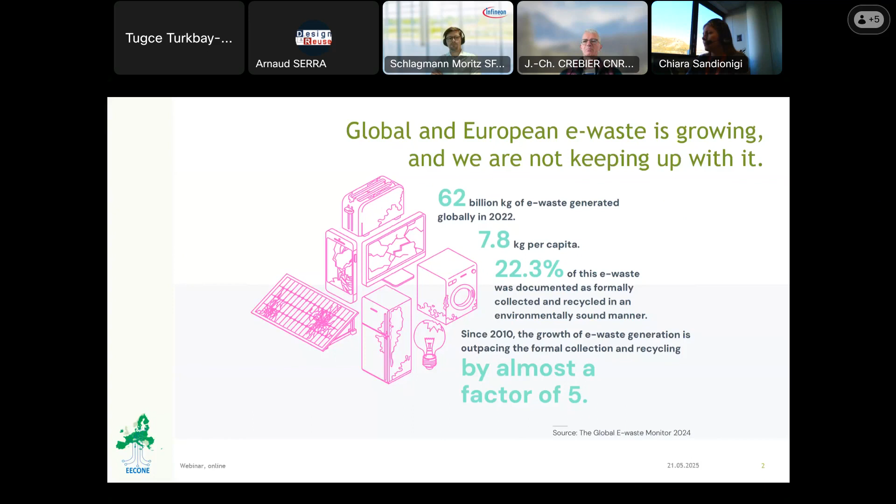So the EECONE project, we are guided by the 6R principles: reduce, reliability, repair, reuse, refurbish, and recycling. And our 4 key objectives, therefore, are: first, we want to define green ECS. So we want to have clear, simple and open tools to define the ECS for circularity.

Then on the second step, we want to make green ECS, and this is what we learn about. What can we do about it? And also showcase the green solutions, and then building consciousness around us. Today we have 4 interesting talks.

So in general, we are over 50 partners from all over Europe. And today we will hear interesting talks from Fraunhofer IZM in Germany, from imec in Belgium, from Dassault Systèmes from France, and Nero Bianco from Italy.

And in EECONE, we have this toolbox, and it's being developed even better and better as we speak. And what I'm trying to show here is kind of the wide variety of tools in the toolbox that are in use and in development within the EECONE project. You can see that various levels of sustainable electronics are being addressed, from the IC chip level at the bottom up to assembly and even system level evaluations, with a wide variety of goals and a wide variety of scopes.

I'm not going to go over all these tools in detail, but I highly recommend looking into the ones that are of interest for your specific application, your specific study. But the main thing I want to show here is that by combining different expertises from different organizations that all bring their strengths to the table, you can address a wide variety of complex problems.

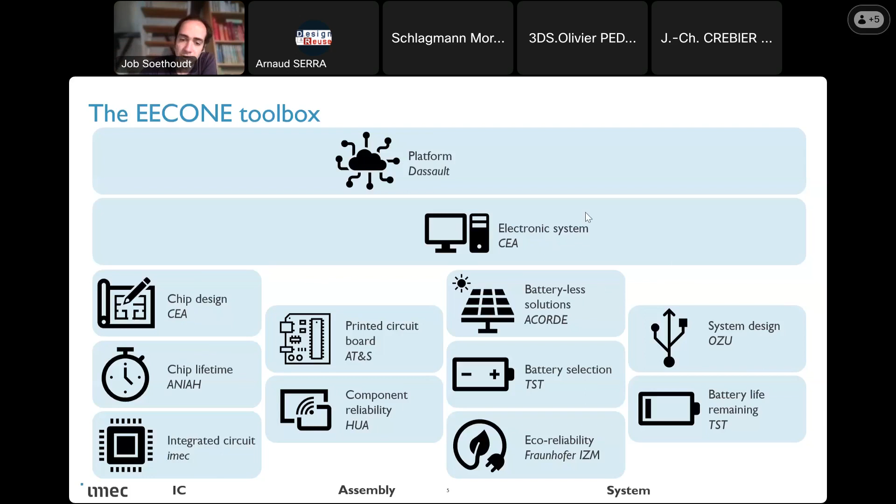So what does this approach rely on? Only two things. Firstly, the tools need to be good. And secondly, the collaboration needs to be good. Good tools. I take here my own tool, not because I think it's the best one. In fact, every tool has a very different purpose. This is just the one that I can answer questions for because I know it.

So for instance, this is one tool that we develop to assess the environmental impact of IC chip manufacturing. And it goes into quite a bit of detail where you can select options. For instance, I want to assess a CPU, or I want to assess a memory technology from a certain generation, die size, from a certain fab with specific properties. And you can then put all these parameters into the model, and it will basically build a bottom-up fab model around it to then ultimately generate things like the climate change impact or the amount of resources being depleted.

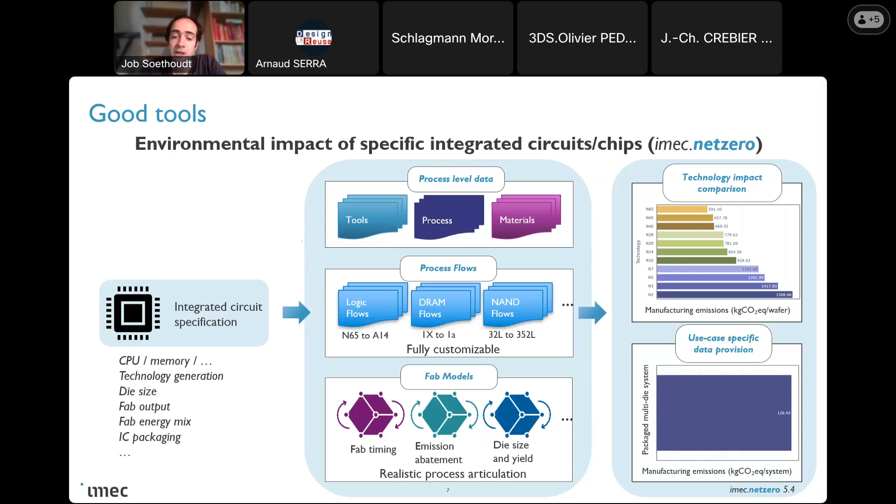And this is basically just one of the tools. This applies to the evaluation of ICs for the specific purpose of environmental impact assessment. But as I showed on the slide past, at a variety of levels in the system, you can use complementary tools from complementary organizations. Then, of course, the second part that is necessary is good collaboration.

The way that we do this in EECONE, we have a use case, which is basically a certain application that wants to become sustainable. And then we have the tool makers that provide tools like the ones I've just shown on the last few slides. It is up to the use case lead to go to the various tool makers and say, this is the information I need from you. For instance, we need to understand how much we can reduce the carbon footprint and material use by making a thinner printed circuit board, which is something, for instance, that the AT&S tool can help with.

Then the tool maker, in this case AT&S, can support a use case lead to meet the need by basically specifying, okay, these are the parameters I need for your specific application, and then we can support your exercise of becoming more sustainable in your electronic products. And then, of course, there needs to be mutual clarity on these are the assumptions I'm making, and this is the methodology I'm using to answer your specific need.

And this is really, in a very brief overview, why our approach is, I believe, so strong, because we combine good tools that rely on the expertise of a broad variety of very experienced organizations within the European ecosystem, with good collaboration to address these use cases with a wide variety of scopes and goals. And of course, this approach is not limited to the ones that we're currently studying in EECONE, but the approach is generalizable to an even wider variety of applications, with the ultimate aim of course, working towards sustainable electronics across the supply chain. And that's basically what I wanted to share briefly on the scope of EECONE and how it can also help your specific applications by following this approach.

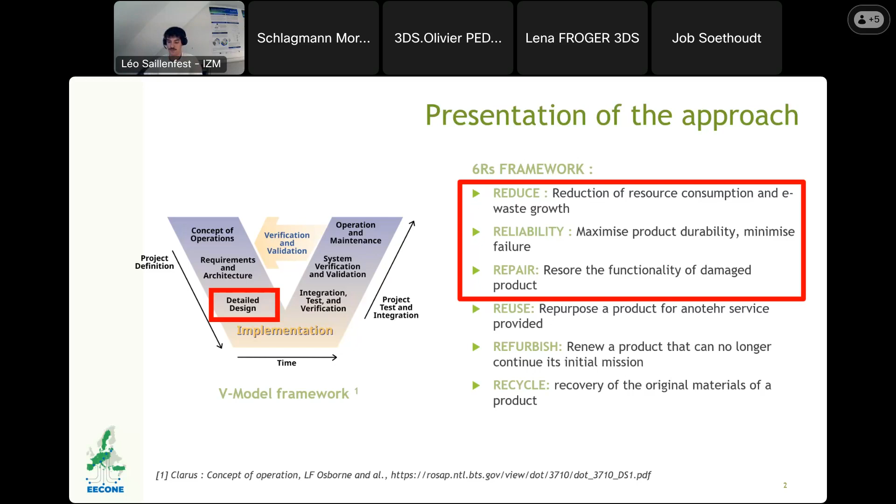Let's go now further into the overview of this methodology. This methodology is divided into 5 steps. The first one is about the expected lifetime. Then you do a reliability study, repairability study before going to the environmental impact assessment. And you finish with a new metric, which is called effective environmental impact, and that brings these 3 topics together.

Let's dive a bit into, first of all, this approach: you will have to determine the expected lifetime of the studied system that you want to design. The goal is to really answer how long do you expect your studied system can live. So not the warranty time, not also a super long time because you want to have a product that lives forever, but more how long your product should live before it's not used anymore.

If we take the example of a Fairphone 2 motherboard, most of the phones today are used for almost 7 years. And after 7 years, more than 90% of the phones are not used anymore. So you have to take into account that this obsolescence is here because technology is evolving super fast. You can also take into account potential life extensions of the studied system.

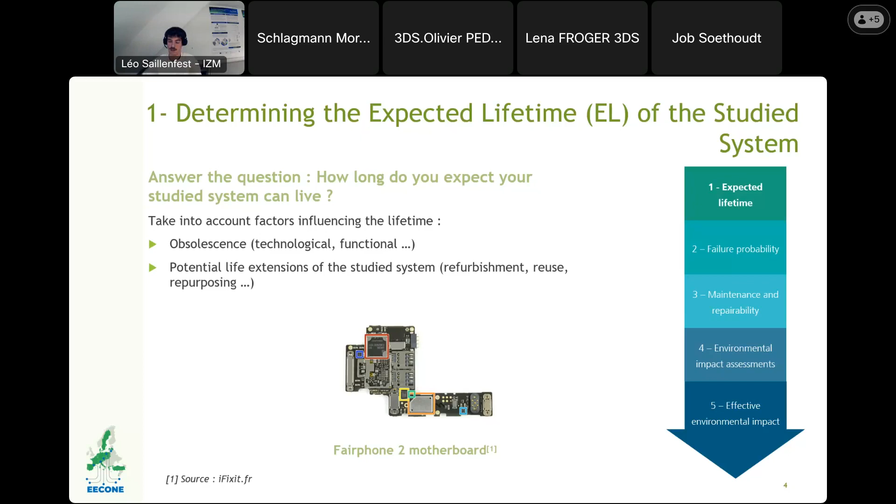Once you've done this, then you can focus first on the reliability study. The goal is to define both constant and aging failure. You have different ways to do it, through estimations, through models like the Weibull model, or different information that you could have about the technology failure rate. You could also work with your supply chain to get these failure rates, or also work with predecessor products that are used in similar cases, or even do some tests or search in the literature.

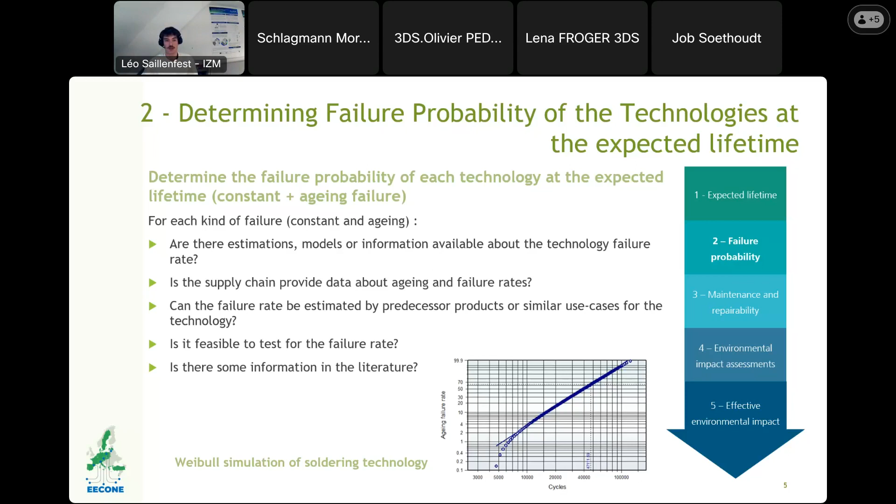Once you get this constant and aging failure rate, you can focus on the maintenance and repairability of the product. In this part, you have to focus on, for each technology, in the case of failure, what needs to be replaced, how can we repair the product, what's the whole process to do this. So in case of failure, what's the smallest part we can replace? It could be just a joint in case of a joint failure. It could be the component also in case the component is also failing through the joint failure. Could be a submodule, or even in case of no possibilities to repair, it could be the entire product that we need to replace.

And once you've done this, you have to focus on the repair, the process to repair, and also on whether you, the company, or a third professional party, or the customer itself is able to do it. Because if no one is able to repair the product, even if the process to repair exists, then you should take into account that your product cannot be repaired, and then in case of failure, you need to replace the entire product.

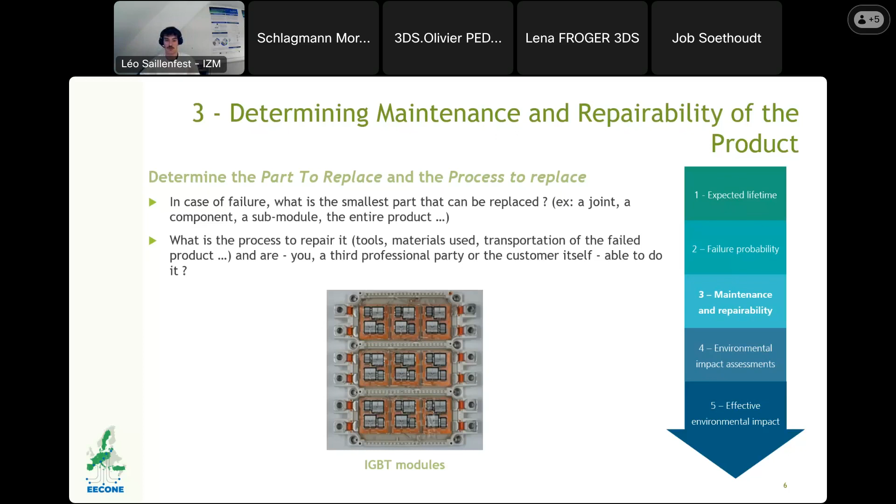Once you've done the repairability assessment, you can focus on the environmental assessment of the technologies themselves. So for each technology, you should do the environmental assessment, and to ease your work you can focus only on the differences between the technologies. If you have some steps that are done in the two technologies, then you can avoid them. And once this is done, you also have to do the environmental impact of the repair process for each technology, which means the production of the part to replace, the material and energy consumption, and also the transportation.

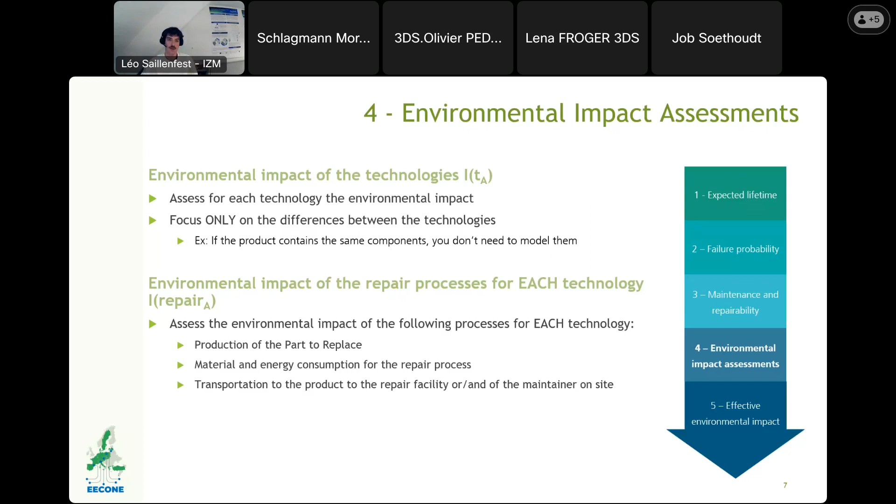And when this is finished, then you can bring everything into one new metric, which is the effective environmental impact. And this combines the environmental impact of the technology itself, like for the production, which is still here, and you have to add a certain environmental impact, which is the failure probability multiplied by the impact of the repair of the technology. And through this, you can find new balances between repair, reliability, and environmental impact of the production.

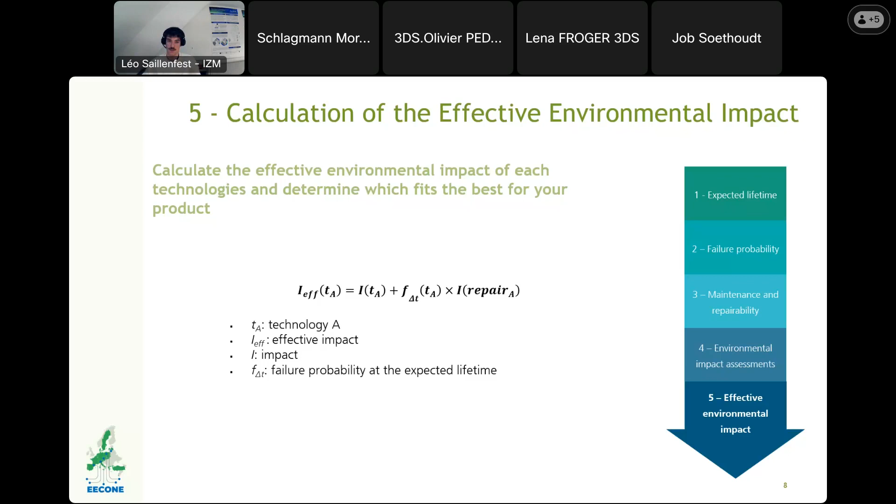To have a short example, I won't dive into the details of the example, but we did a study where we compared sintering and soldering to assemble 3 MOSFETs on a PCB that also had other SMT components soldered on it. And we had to choose between soldering or sintering for these 3 MOSFETs, for a product that we first decided to estimate a lifetime of 10 years.

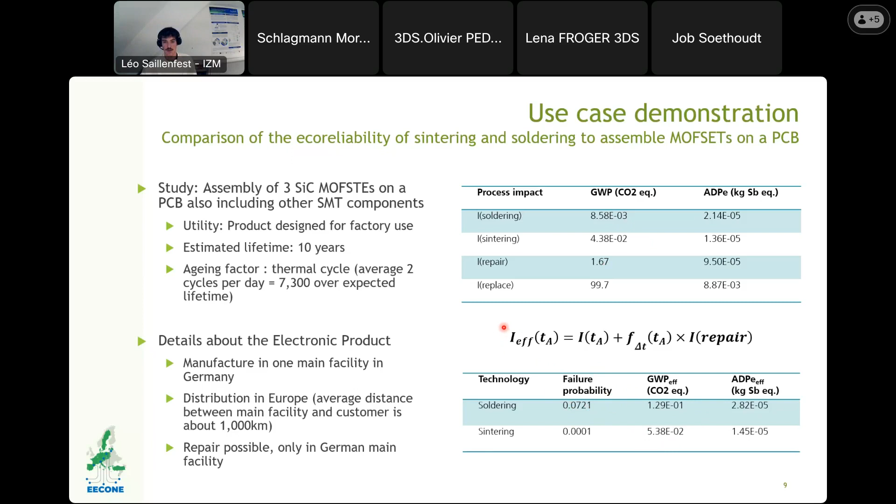And then to finish, this tool can also go the other way around. Where should you put your money to improve the environmental impact of this technology? Where should you focus your time? Is it in the repair, in the reliability of the products, or in the environmental impact of the production? So you can take into account, for example, if there is no maintenance, then you need to replace the entire PCB. It increases a lot the environmental impact of soldering, and in that case, you should focus on sintering anyway. Then if you want to invest some time and money in the constant failure rate, you can see that it doesn't change anything in the results compared to the main results.

And to finish, if you want to invest in the repair distance, so instead of repairing in the main facility in Germany, you use professional repairers everywhere in Europe, not so far from the customers, then you can see that soldering and sintering are the same order of magnitude, and maybe you will choose other parameters like the economic parameter or the brand image to choose if it's better to use soldering or sintering.

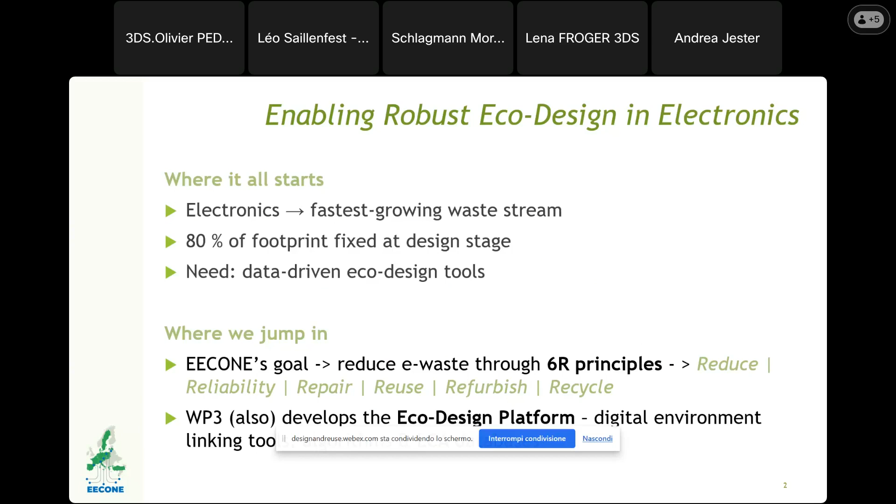So, to cut a long story short, the other presenters have already identified the core focus of the project. And I think the fil rouge leading what they told with the EECONE platform is that we wanted in this project to fine-tune and design something where we can aggregate tools and resources to support eco-design. This is where the Ecodesign platform of EECONE ends up, which is part of work package 3. It might be considered a sort of modular digital ecosystem, designed to support eco-design of electronic components and systems by doing quite many things.

Of course, due to the innovative and research nature of this kind of project, the platform is a sort of evolving creature. But you can already see promising future possibilities and potential for it.

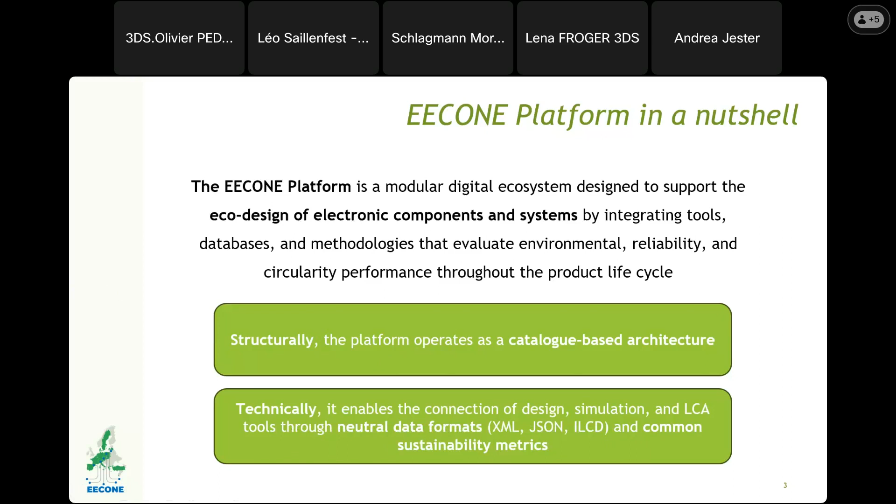And as I always say, as my first employer, I have been working for SAP 25 years ago, said, as long as a person from the business department can easily understand where technical stuff is going to, then we are moving into the right direction. And indeed, the way the EECONE platform is currently being structured is structurally as a sort of catalog-based environment, while technically it enables the connection of design, simulation and actually LCA tools through neutral data formats, which makes it quite attractive. This approach changed a bit during the lifetime of the project.

Initially, the consortium had in mind actually to make it a more sort of 5-layer integrated system. But then we actually understood that it might end up in a sort of too rigid environment, and so it switched to a modular catalog-based platform, where basically each tool that is in there, that I will then shortly present, is identified by an ID card, so easily identifying its scope, the data that are required, and how actually it supports the 6R logic. It makes it, of course, more interoperable, and we guess also more scalable, especially if we think about medium or smaller companies that are looking, as we will see later on in short, how to use things like this.

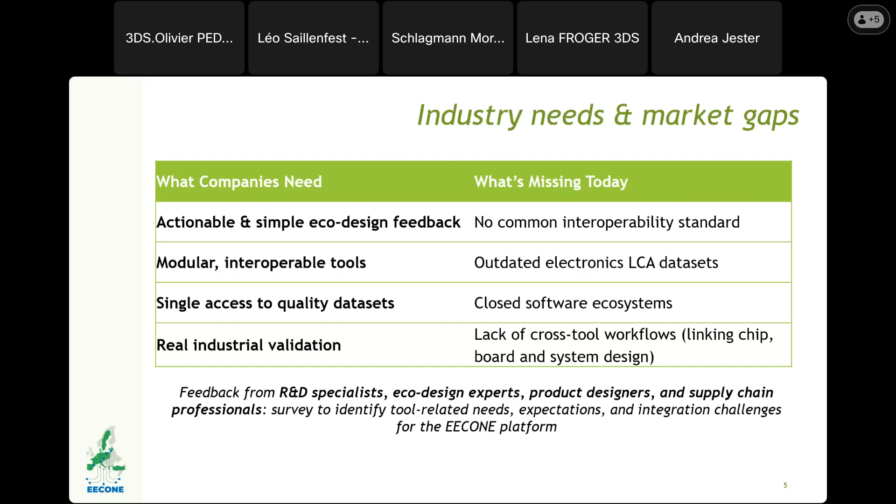The work was initiated actually by a sort of initial survey, where we have been exploring what R&D specialists or other experts would like to find in such a platform. So there are here these 4 major items. So let's move away from these, let's say, long LCA reports; they are looking for actionable and simple eco-design feedback, regardless of the kind of tool that we have. They're looking for interoperability, good quality data sets to start from, and ideally something that is validated also through real industrial use cases. And that's exactly where the EECONE project wants to make a difference, by having use cases who, use case by use case, try to use and connect the different tools that we have.

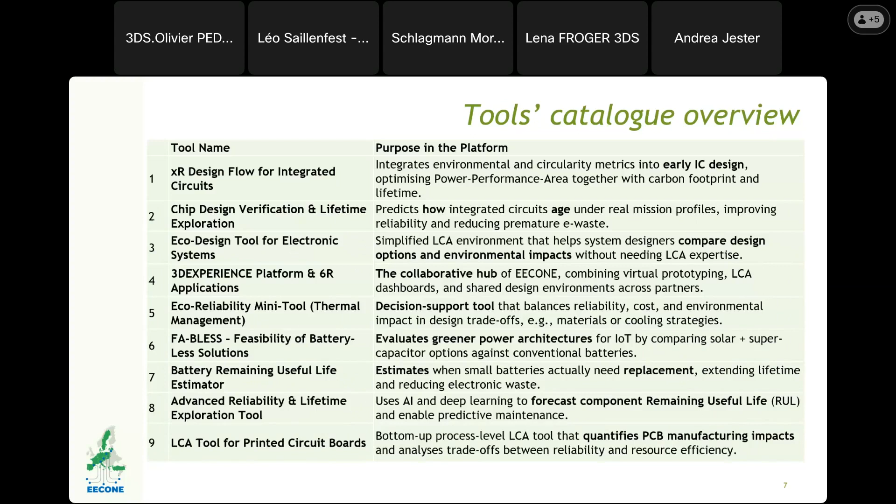And this ends up summarizing what is the current value proposition, according to us, of the platform for companies. It puts basically eco-design and these tools into daily practice. It has been designed to be rather more operational, and not to consider eco-design as a sort of follow-up or simply compliance exercise. It provides transparent data and also the metrics, especially through the ID cards. It's ready for compliance because it aligns with regulation. And as I said at the very beginning, it makes this very scalable for SMEs. If I need 1 tool, I can pick up 1 tool. If I need more, I can pick more, and I can then leave the engineers to put together the appropriate workflow depending on their necessity.

And how we see it in the long term, of course, this is the most challenging thing. Well, let's say that the dream could be to make it a sort of European infrastructure for sustainable electronics design in the long term, where we should make sustainability measurable and comparable across different tools. It should also help to reduce the costs and complexity of the compliance processes. And most of all, what we would like to stress is that it changes the approach, moving from keeping sustainability as a reporting exercise and shifting it into a sort of design capability.